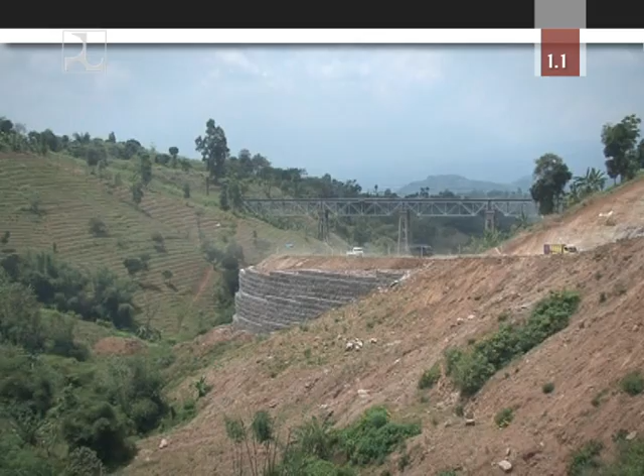Roadwork is important, necessary, and unavoidable in any road network. New roads must be built. Existing roads have to be maintained. Sometimes roads are duplicated or upgraded. New bridges and flyovers are built, and a wide variety of traffic management improvements take place.

In most cases, the roadwork has to take place in or close to moving traffic. Even when a new road is built through rice paddies and is able to be constructed free of traffic, it must eventually join to an existing road at each end. Unless very carefully managed, roadwork sites can lead to increased risk for those using the roads, as well as the road workers.

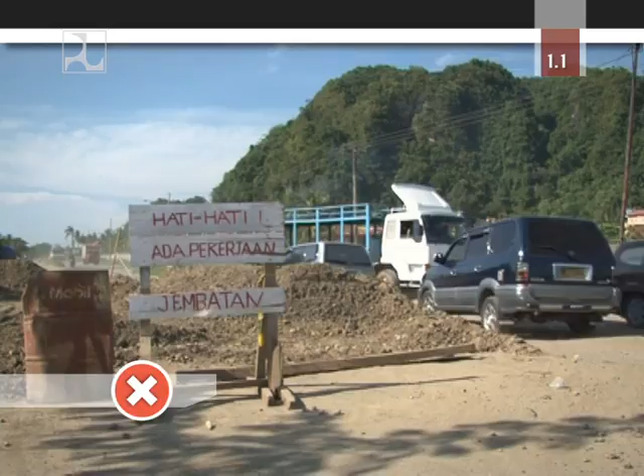Road safety at roadworks is an important but often neglected part of road construction and maintenance in Indonesia. The safe management of its roadwork sites is an important responsibility for any road authority. In Indonesia until now, a roadwork site has been characterized as a place with possible hidden surprises. Uneven road surfaces, few warning signs, and little guidance for the road users. It is time to improve this situation.

Road safety at roadwork sites in Indonesia can be improved, and at little cost. All it takes is dedication to safety by all responsible for the project: the contractor, the client, and the consultant. It also needs some clear thinking by engineers and the knowledge about what to do. This DVD and the accompanying manuals will give you that knowledge. Putting it to good use at roadwork sites in Indonesia is now your task.

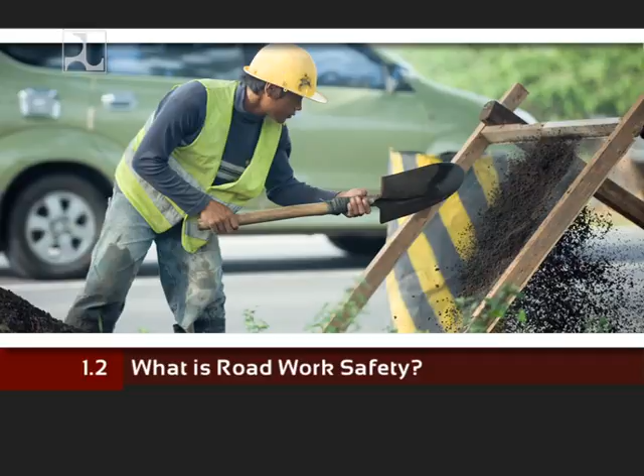Roadwork safety is the name given to the provision of signs, barriers, delineation, and other physical safety devices to ensure that the risk to road users and road workers at a roadwork site is as low as practical. Providing road safety at a roadwork site should be a high priority element of every road construction project or road maintenance activity, from the time the planning process begins until the time the project construction is complete. Traffic management at roadwork sites therefore often requires higher standards of safety than on the remainder of the road network.

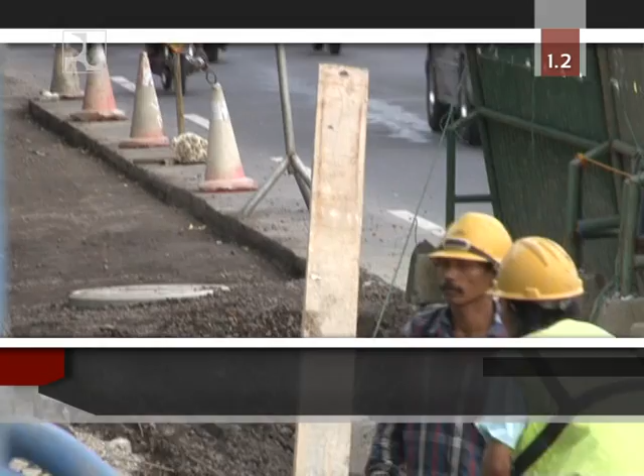For example, lane closures, lane narrowing, sharp curves, and other abrupt or frequent geometric changes must be appropriately designed in terms of speed, advanced warning, and delineation to provide road users with clear warnings and guidance. The signs and devices used at roadwork sites are a vital form of communication to the road user. Without a rational and consistent system of signage at roadwork sites, safety of the workers and travelling public is compromised.

The objectives of safe and effective worksite signing and traffic management are to provide a safe working environment for workers on the site, warn approaching road users and pedestrians of roadworks, guide the road users through, past, or around the roadwork sites safely, provide minimum inconvenience for the travelling public, and provide minimum inconvenience to work at the roadwork site.

Road crashes are due to three things: the human, the vehicle, or the road. Most people blame the human, the driver, the rider, the pedestrian, for all the crashes on the roads. Most people will say that the police should work harder to enforce the traffic rules, and in doing so the crashes will be reduced. Many road engineers also share this view. They underestimate the importance of their own work in reducing road crashes. Studies have shown that up to 30% of road crashes are due to the road and its interaction with the road user, the human.

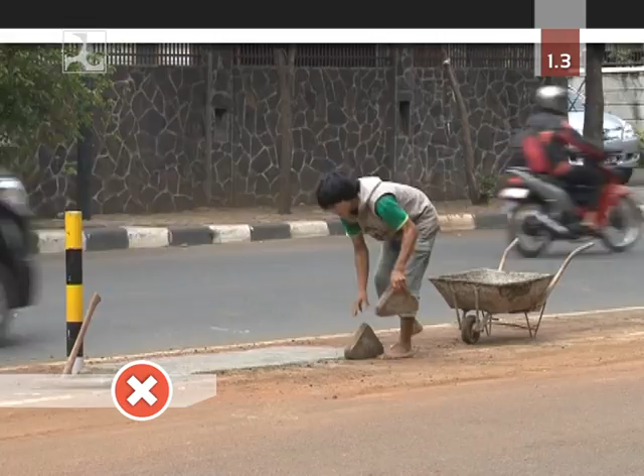At roadwork sites, for instance, engineers may fail to realise that many of the human mistakes that are made by the drivers or riders are due to failings by an engineer. A warning sign was not installed where it was needed. The roadwork site simply happened, without the necessary traffic management plan in place. Road safety engineers can improve safety at roadwork sites by putting themselves in the shoes of the road users and by empathizing with their needs.

An experienced road safety engineer will always ask the question, what will the road user make of this? An engineer who is concerned for road safety, as well as for the safety and well-being of the workers at the worksite, will then take steps to provide a worksite that is clearly signed, with strong delineation and clear speed restrictions.

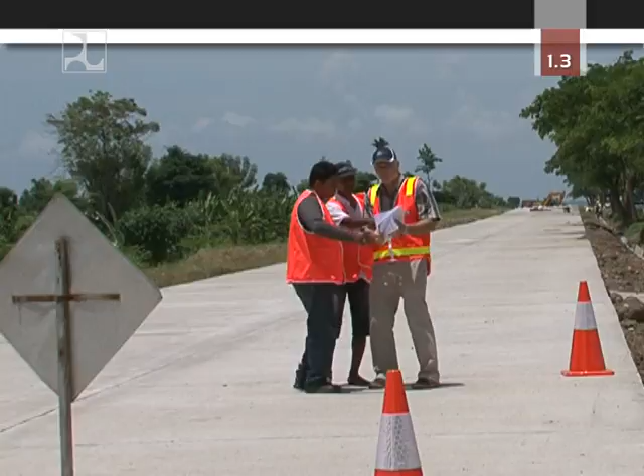Engineers can make a difference. Engineers can save lives and prevent injuries. You can use the advice contained in this DVD and accompanying manual at low cost to influence the design, construction, maintenance, and operation of safer roadwork sites. Engineers have a vital role to play in providing safer roads for all Indonesians.

Supervisors and workers have the following responsibilities. Supervisors should be aware of their responsibility to provide safe and convenient travelling conditions for the public and safe working conditions for personnel under their control. Establish the position of safety officer to care for all occupational health and safety, as well as road safety matters during the roadwork. This is especially important for long-term roadwork projects.

Ensure that all personnel involved in the traffic signing and traffic control are aware of what is needed and of their responsibilities. Provide training for all personnel involved in traffic signing control. Inform other road stakeholders, in particular the local Directorate General of Land Transport and the Traffic Police of the roadwork.

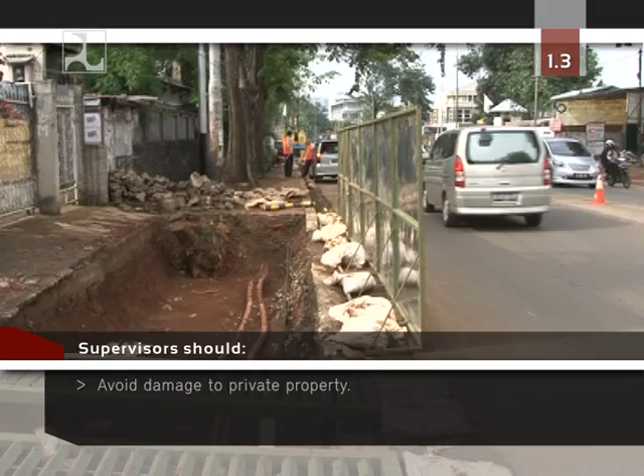Inform the road users about the roadwork. For long-term work, information about the duration of the roadwork should be provided so that the road user can anticipate the effect of the roadworks. If there will be congestion, they may wish to choose a different route. Manage the site to avoid damage to private property. Be familiar with the provisions of this DVD and manual and act accordingly.

Workers should take responsibility for their own safety by looking out for danger and being observant. Take care of the safety of other personnel and visitors to the worksite. Wear the protective clothing that is provided for their safety. Engage only in work practices that do not put himself or herself or any other person at risk. Follow the instructions of their employer in carrying out the requirements of this DVD and the accompanying manual.

There are three categories of roadworks: long-term works, short-term stationary works, short-term mobile works. Each of these three categories of roadwork should be suitably signposted in accordance with general principles governing proper signposting. This means that they must give drivers and riders proper and gradual advanced warning of the changes to the traffic conditions and ensure that vehicles pass through the roadwork safely.

The signposting must provide warning of the type and shape of obstruction and how to proceed so that drivers and riders can pass safely through or past the works area. In addition, signposting must be consistent and comprehensible and common to all roadworks along the road. The three different categories of roadworks usually require different types and amounts of traffic management. For this reason, planning the staging of the roadworks well in advance and designing a suitable and safe traffic management plan are two of the most important steps you can take in road safety at roadwork sites.

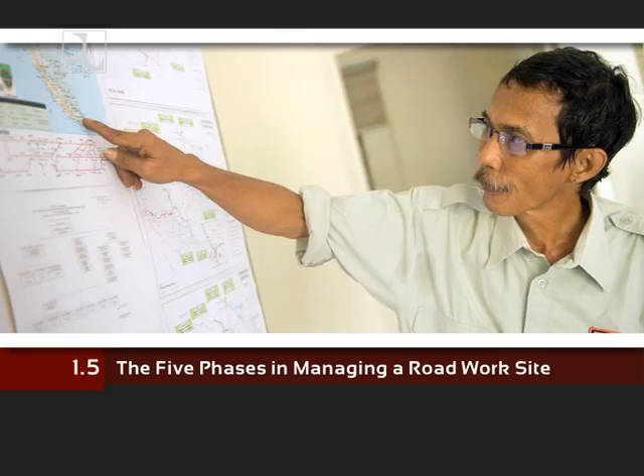The 5 phases of managing a roadwork site are: planning phase, design phase, implementation phase, operation and maintenance phase, closeout phase. Each of these phases has a clearly different and important role to play in your roadworks.

Planning ahead for safety at your worksite is always time well spent. It is a positive and necessary part of roadwork. There are some key steps along the way, and by carefully considering each one, you can design, implement, and manage a safe worksite. The contractor should start by designating an engineer as the responsible individual for roadwork safety at the worksite. That engineer should be responsible for preparing a traffic management plan, a plan that shows the exact signs, delineators, cones, barriers, and other traffic control devices to be used for each stage of the works.

Developing a traffic management plan takes knowledge and experience. Each site needs careful and detailed attention because no 2 work sites are the same. Despite the need to remember the uniqueness of your worksite, there are many common factors which reoccur on most roadwork sites. By following a series of key steps, you can gather together all the necessary information you need to develop a safe and effective TMP. Step 1. Decide the category of your roadwork. Roadworks are divided into 3 categories: long-term works, stationary short-term works, mobile short-term works.

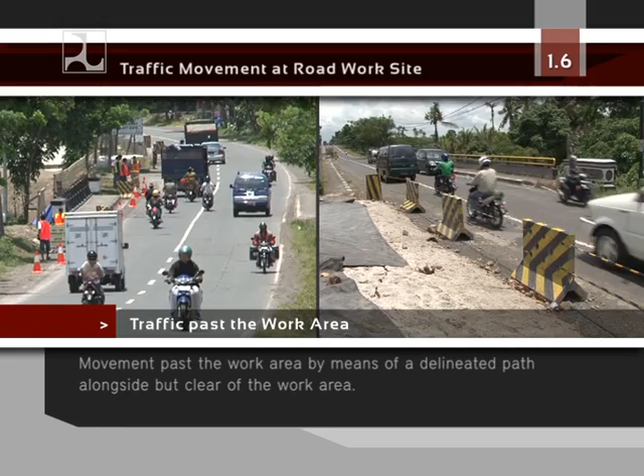Step 2. Establish the staging of your works. Begin by asking in which of the following ways the traffic at your roadwork site will be managed. Movement through the work area under closely controlled conditions. Movement past the work area by means of a delineated path alongside but clear of the work area. Movement around the work area by a detour, which may be via a side track or an existing road. Closure of the road for short periods while the work is carried out.

Decisions about the staging of the roadworks are fundamental to road safety. The staging of the roadworks will have a large impact on the road safety at the roadwork. The engineers responsible for the roadwork safety should communicate with the project manager and ascertain the staging of the works. This is a critical matter. Depending on the staging of the works, the preparation of the traffic management plan can either be a simple task or it can be a very complex task.

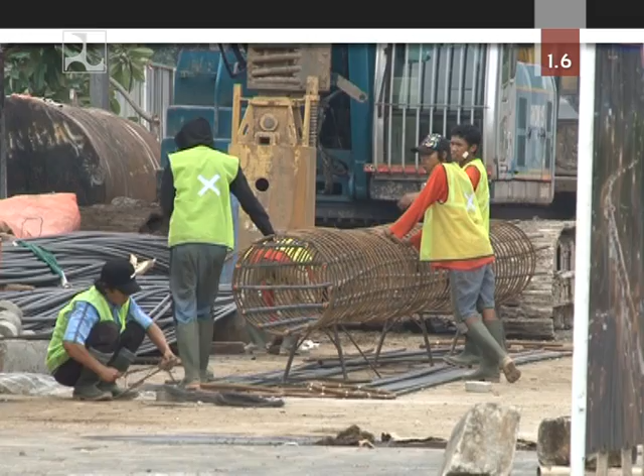Step 3. Consider the class of road, plus the volume and composition of the traffic. The road safety of road users and road workers will be enhanced by ensuring that the roadwork site is managed in such a way as to cause the minimum amount of inconvenience to traffic movements.

You may need to consider how your works can be arranged to minimize disruption of established traffic movements and patterns, interference with traffic at peak periods, interference with public transport services, and the amount of road closed to traffic at any one time.

You can minimize delays by maintaining open as many lanes as practical. You may minimize delays by having most work carried out at night. You may also be able to make use of portable traffic signals or well-trained traffic controllers in order to control the traffic movements as efficiently as possible.

Step 4. Consider where the traffic will go. Traffic will continue to use the road, and so clear decisions need to be made about just where the traffic is to be directed: through the work area, past the work area, or around the work area.

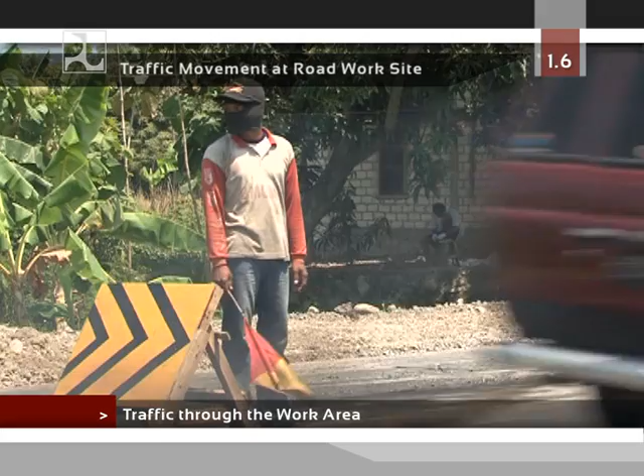Traffic passing through a work area should only be permitted where both the traffic and the work can be adequately controlled. Traffic controllers are usually required to slow or stop the traffic for short periods to allow the safe movement of machinery or for other operations.

Traffic past the work area. If a detour or sidetrack is not possible, the normal method for traffic management is to have the traffic travel past the work area. Traffic paths past the work area are to be clearly delineated to ensure the road users do not become confused and to minimise the risk that some may inadvertently enter the worksite.

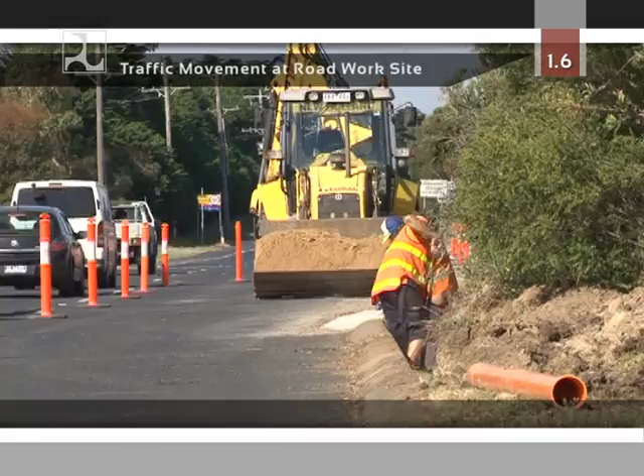Traffic around the work area. When it is not practicable to allow traffic through or past the work area, a detour is needed. Such a detour may involve using some of the existing road network, or it may involve a specifically constructed sidetrack.

Step 5. Consider the safety of road workers. Ask yourself the following questions related to worker safety. Is my work long-term or short-term? Worker safety at short-term works can be achieved by work methods that do not expose the workers to long periods of time working close to passing vehicles.

Safety measures such as high visibility clothing, warning devices on work vehicles, and other workers acting as lookout personnel can be suitable for these types of work. If these types of controls are not suitable for any reason, then more substantial controls are to be adopted.

How will workers be protected from traffic at the roadwork site? If your work is to be long-term, will it be through strong delineation and very low speeds, or by providing a barrier between the work area and the moving traffic? Or, if such a barrier is not practicable, will safety be assisted by providing an adequate lateral clearance between the edge of the work area and the nearest traffic lane?

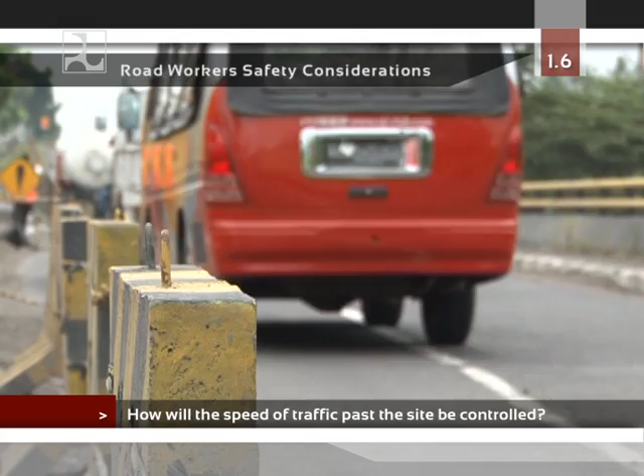Step 6. Consider how best to provide for pedestrians and bicyclists. Where pedestrians, including people with disabilities, have to move through, past, or around a work area, or to cross the road within a work site, they should be provided with and directed to suitably constructed and protected temporary footpaths and crossing points.

Pedestrian and bicycle paths should be provided on the same scale and to the same width as any facilities for pedestrians or bicycle traffic that existed prior to the works. Where footpaths or crossings for pedestrians have been temporarily relocated, the following requirements are recommended for the temporary facilities.

The footpath surface must accommodate all users. The surface of the footpaths and/or the crossings should provide safely and conveniently for handcarts and wheelchairs, and for the visually impaired.

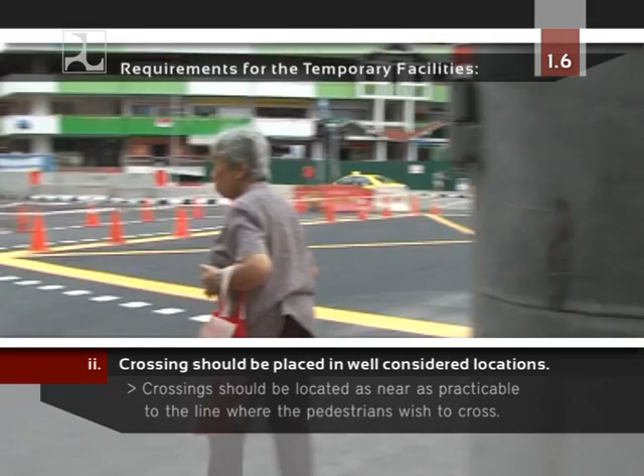Crossings should be placed in well-considered locations. Crossings should be located as near as practicable to the pedestrian's desire line, that is, where the pedestrians wish to cross. The crossings should be at the same standard of both width and surface smoothness as the crossings they replace.

Pedestrians and vehicles must be kept separated. Where pedestrian traffic has been diverted onto an existing roadway, the pedestrian path should be separated from vehicular traffic. A mesh fence with no hazardous struts or hazardous poles, or a solid line of plastic cones or bollards may be used for this.

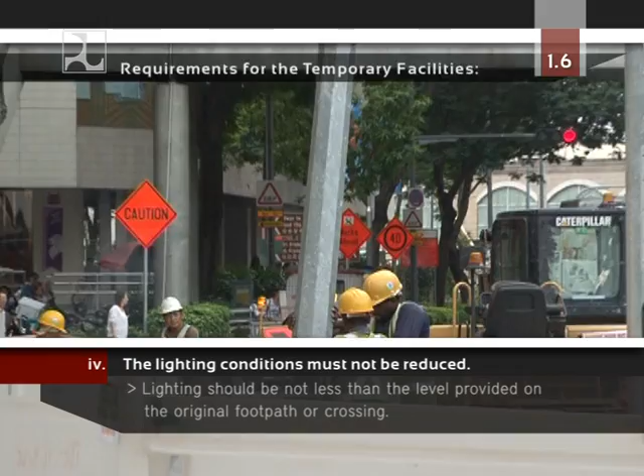The lighting conditions must not be reduced. Lighting should be no less than the level provided on the original footpath or crossing.

A traffic management plan, or TMP, is a plan that shows clearly all of the signs, barriers, barricades, and other devices that are to be installed and maintained at the roadwork site for the duration of the works. If the work has a number of stages, there should be a TMP for each stage. A TMP should be prepared for all roadwork sites, short and long term.

When preparing a TMP, start by looking at the large-scale issues and gradually work down towards the detailed items. The large-scale issues can be addressed in 3 steps. Step 1. Consider the risks at the worksite. The following are some hazards that could be encountered at a roadwork site and which need to be addressed in your TMP.

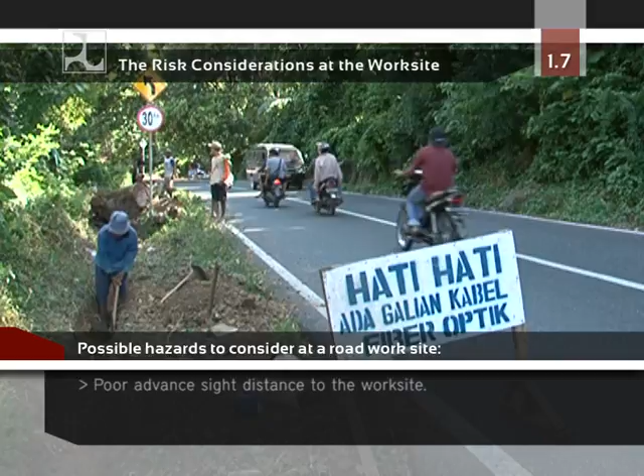Poor advance sight distance to the worksite. High-speed traffic through the worksite. High volume of traffic through the worksite. Narrow pavement width with no escape route. Workers too close to the passing traffic. Presence of unshielded hazards.

Excavation adjacent to traffic. Rough or unsealed road surface due to the roadworks. Loose material on the road surface. High volumes of heavy vehicles through the worksite. Work vehicles entering or leaving the worksite. Bicyclists or pedestrians moving through the worksite.

When deciding how to manage risk and how to keep a safe roadwork site, you should consider the severity of the hazard or risk, the state of knowledge about the hazard or risk, the nature of the works, for example long-term or short-term works, the availability and practicality of possible hazard or risk control measures, the cost of removing or mitigating that hazard or risk.

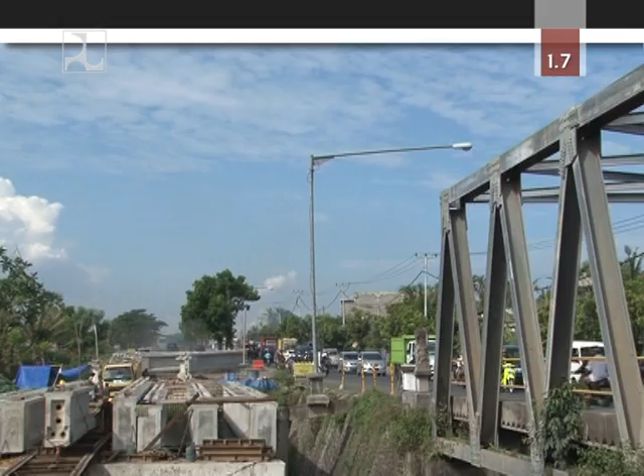Step 2. Consider the risk control measures that could be used at your worksite. The following examples are practical options within each risk control measure. Risk elimination. Can the risk be eliminated? Divert the traffic away from the worksite. Install a sidetrack. Close the road for the duration of the works.

Engineering controls. What engineering measures or protective devices can be implemented to minimize risk? Safety barriers, lane closures, reversible or contraflow traffic, portable traffic signals, crash attenuators, vehicle-mounted attenuators, escort or pilot vehicles, increased clearance to the worksite.

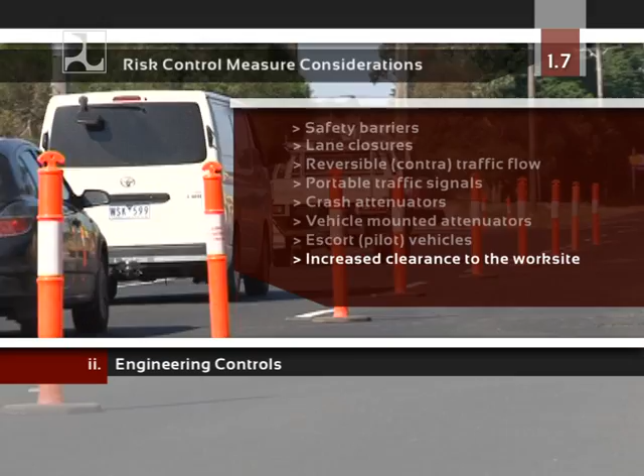Administrative personal protective equipment. What can be done to adjust the behaviour of traffic travelling through the worksite? Speed restrictions, signage, traffic cones and bollards, traffic controllers, delineation of the travel path, lead and/or tail vehicles, a variable message sign or VMS, vehicle-mounted signs and devices, working at night if safer, high visibility clothing for all workers.

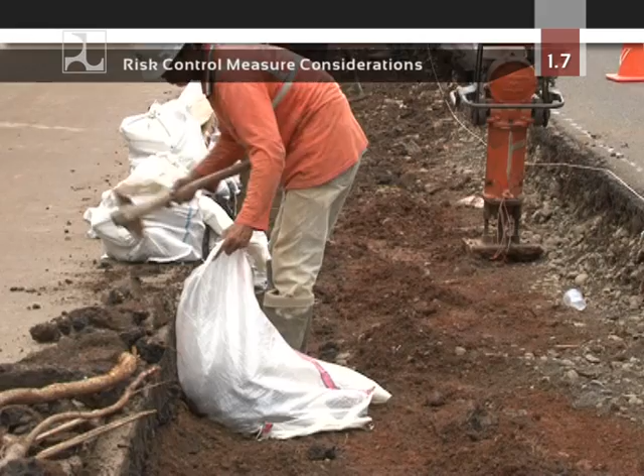In considering the risk control measures that could be used at your roadwork site, it should be recognised that there is often a need to satisfy competing objectives such as maximising the safety of workers and all road users, minimising the delays to traffic, managing the costs of the risk control measures so that they relate to the costs of the associated works.

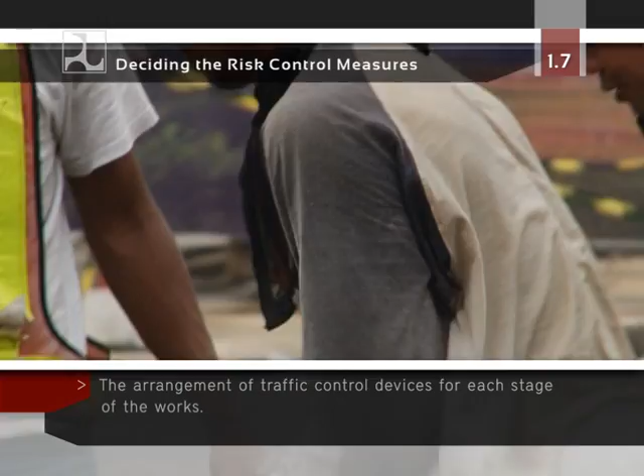Step 3. Decide the risk control measures to be implemented. Having considered all risks, decide on the risk control measures you will apply in consultation with those who will be working on the worksite or supervising the works. You now come to the point of considering site-specific points of detail for your TMP. The arrangement of traffic control devices for each stage of the works. Arrangement and number of traffic controllers required for each stage of the works.

Any job-specific requirements, for example, a nearby school, hospital, or access to shops. Provision for very large vehicles. Provision of safe passage for pedestrians, bicyclists, and people with disabilities. Impact on public transport. Potential for traffic to queue into conflict areas, for example, across an adjacent railway crossing. Provision for access to abutting properties.

Duration and time for conducting the works, for example, day or night operation. Traffic management arrangement at the worksite outside normal working hours or when workers are not present at the site. Emergency contact details. Communication arrangements.

A well-designed TMP will assist you to overcome the common problems at roadworks on Indonesian roads at present, such as placing advance warning signs too close to the work area, using incorrect signs, applying inadequate taper lengths, and using unsafe delineators. There are too many surprises for road users at work sites in Indonesia at present.

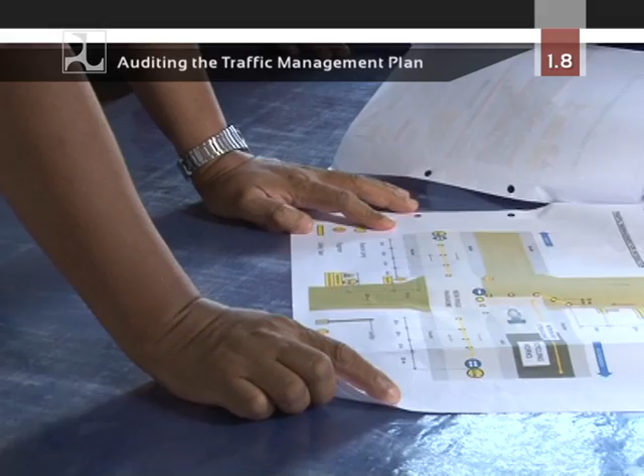To ensure the traffic management plan is adequate and is implemented correctly, the project manager is expected to commission an audit of the TMP before and after it is implemented at the roadwork site. Firstly, a desktop or before audit of the TMP is carried out. Once the TMP is implemented, the site or after audit is carried out. This audit should be conducted both daytime and nighttime.

Audits look at the traffic management arrangement from the road user's point of view. The audit team puts themselves in the shoes of the road users and should look for safety concerns. Signs that are missing, signs that are wrong, tapers that are too short, and items that are hazardous.

Items to consider in the desktop road safety audit include traffic volume and approach speed. Higher speeds and higher volumes generally increase the risk at a site. Road geometry. Will this reduce sight distance and increase the risk of surprises? Sign placement. Are all the signs located according to the zone concept?

If signs and markings conflict with one another, they must be removed or corrected. Travel path. Is it clear where all the drivers and riders are to travel? Delineation. Clear and made from forgiving materials. Have lane widths been changed or altered to allow for changes in the environment?

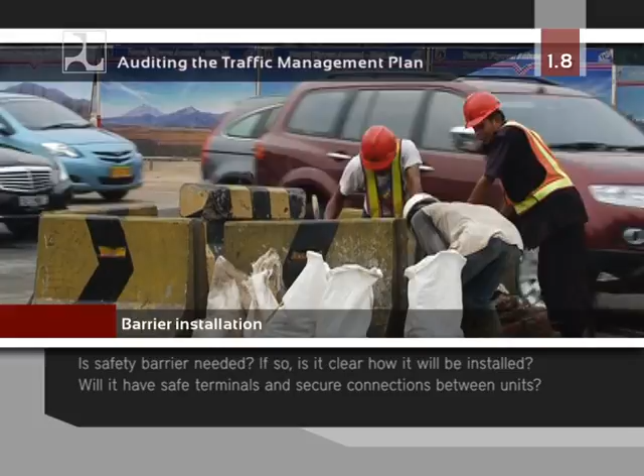Is safety barrier needed? If so, is it clear how it will be installed? Will it have safe terminals and secure connections between units? Roadside hazards. Have these been removed or shielded? Worker safety. Will workers be trained in worksite safety, and will they all be required to wear high visibility vests?

Is there an escape path for workers? Are pedestrians through or around the site being considered? Will all construction entry and exit points be safe? All the safety concerns detected in the desktop audit of the TMP are to be resolved by the project manager. Only after all are resolved can the work begin on setting up the roadwork signs and devices.

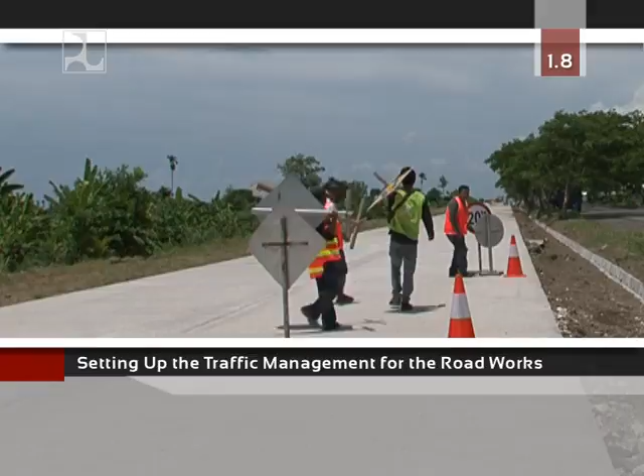Before any roadwork commences, all the signs and devices should be set out in accordance with the approved traffic management plan. This should be done in the following sequence: advance warning and regulatory signs in the approach warning zone, starting with the signs the greatest distance away from the work zone and working inwards towards the work zone. Signs in advance of the taper or near the start of the work area.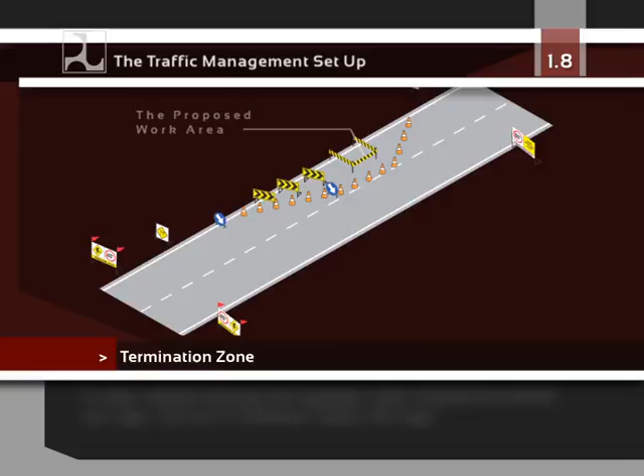All delineating devices required to form the taper, including illuminated flashing arrow signs at the end of the taper. All delineation of the work. All other required warning and regulatory signs, including termination zone signs and end of temporary speed zone signs.

After your traffic management plan has been implemented, an audit should be undertaken to ensure that it is installed and operating as expected. This audit should take place before the roadwork commences on the site. If changes are found necessary, these should be made straight away.

Common issues that you should look for during the audit inspection include signs that are located behind trees or obscured by structures, damaged and non-reflective signs or signs facing the wrong way, visible permanent signs that should be removed or covered during the roadworks, tapers that are too short, possibly because of horizontal or vertical geometry on the site,

gravel, mud, sand on the pavement. Ensure the pavement is swept clean of sand and gravel. This is critical for motorcyclists and small vehicles. Exposed roadside hazards that require added delineation or possibly shielding with barrier. In urban areas especially, but also in some rural areas, check to ensure that appropriate signs and devices have been installed on all nearby roads, including side roads, that will be impacted by the roadwork.

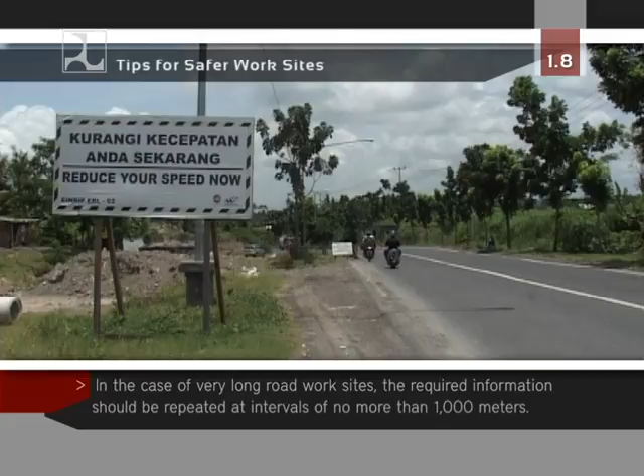Information, presented via traffic signs, should not be given too far ahead of the work area. Drivers and riders will tend to forget or doubt the information provided. In the case of a very long roadwork site, the required information should be repeated at intervals of no more than 1,000 meters. Signs and devices should be regularly checked and maintained in a satisfactory condition. A daily inspection, with damaged or missing signs replaced within the hour, should be your minimum expectation.

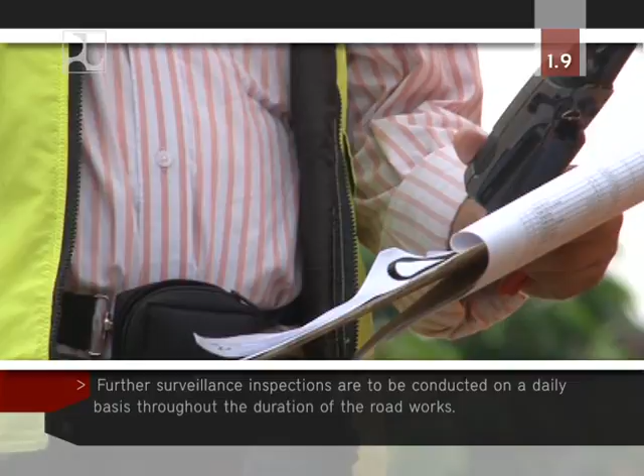The contractor's team commences the roadwork on site when approved by the project manager. This is after the road safety audit findings have been discussed and signed off. Further surveillance inspections are to be conducted on a daily basis throughout the duration of the roadworks. Written records including dates, times, findings, and the engineers involved should be made and kept.

The daily surveillance should check all of the signs and devices on the TMP. If signs are damaged, or if bollards are knocked over, these need to be recorded and rectified as a priority. Roadwork should not surprise a driver or rider. If we can achieve this, roadworks across Indonesia will be much safer for all.

The closeout phase is the phase after the roadworks have ended and during which the traffic management arrangements that have existed need to be removed. The most critical safety issue to watch out for during this phase is to make sure you do not take away necessary signs or delineation and leave hazards exposed.

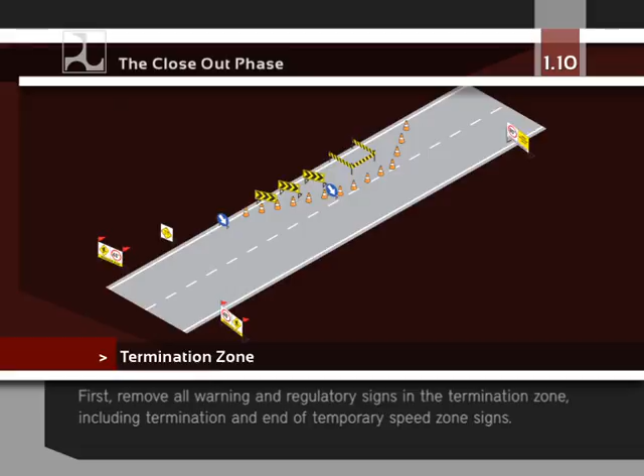Removing the signs and devices at the conclusion of the work is best done in the reverse order to the setting out. First, remove all warning and regulatory signs in the termination zone, including termination and end of temporary speed zone signs. Then remove the delineation around the work area and termination zone.

Remove all delineating devices in the taper, including any illuminated flashing arrow signs at the end of the taper. Remove the signs in advance of the taper or at the start of the work area. Finally, remove all remaining signs, including advance warning and regulatory signs, starting with the signs closest to the work zone and working outwards from the work zone.

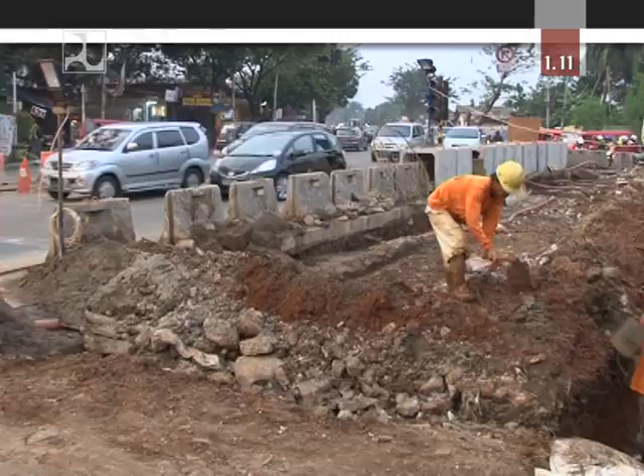There are two groups of customers on the worksite: road users and road workers. Both are humans. Both are important. Whether as road users or road workers, the customers of the traffic management plan are people. Some of the human factors to consider include:

Determine the expected speed of the traffic that will be passing through your worksite. Despite the speed limit that may apply, many drivers and riders travel faster than they should. At 100 kilometers an hour, a car is traveling at approximately 28 meters each second and can take over 200 meters to stop.

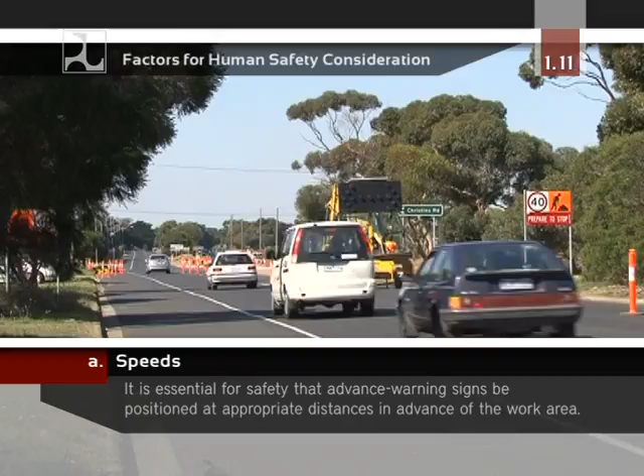It is essential for safety that advance warning signs be positioned at appropriate distances in advance of the work area. One of the common failings at roadwork sites in Indonesia is that the signs are placed too close to the work area. This is almost guaranteed to cause some surprises for some drivers or riders, and that is not good for safety. So ensure that signs are placed well in advance of the work area.

Drivers and riders take time to react once they have noticed something in their path. This time can vary between 1 and 3 seconds, depending on how alert the driver or rider is. Not all drivers are the same. Allow for an average driver or rider reaction time of 2 seconds. Therefore, the length of advance warning that is required in this manual allows for reaction time, as well as for stopping distance. Your roadwork signs must be conspicuous.

The 2-second rule is the norm for all appropriate driver reaction time. However, in a location with poor visibility to the roadworks, the advance warning distance should be longer. Ensure that signs meet national standards and that they are located to suit driver and rider eye height. Drivers and riders need to be able to read a sign while driving, and therefore signs must be designed to be legible from a distance. Symbol-type signs have a much higher recognition rate than word-type signs and should be used wherever possible.

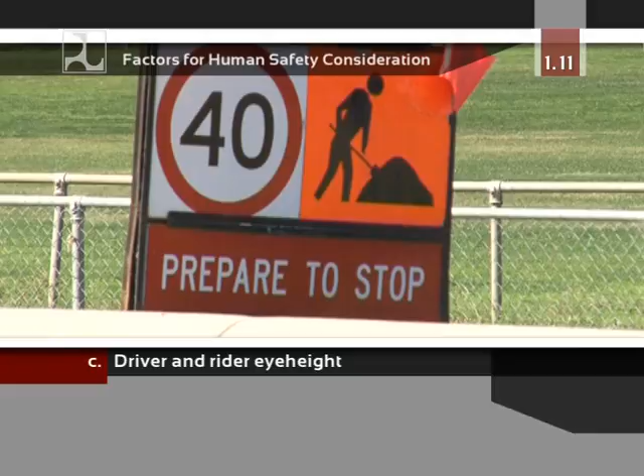Drivers and riders do not always expect the presence of roadwork sites. This lack of expectancy means they may be surprised when faced with a sudden change in the road situation without warning. Remember, there are to be no surprises at roadwork sites. Advance warning of roadwork sites creates an expectancy of changed traffic arrangements so that drivers and riders can modify their driving and look for appropriate guidance. The advance warning sign should be obvious, and the layout of the worksite management scheme should be clear and definite, allowing only one course of action for the driver.

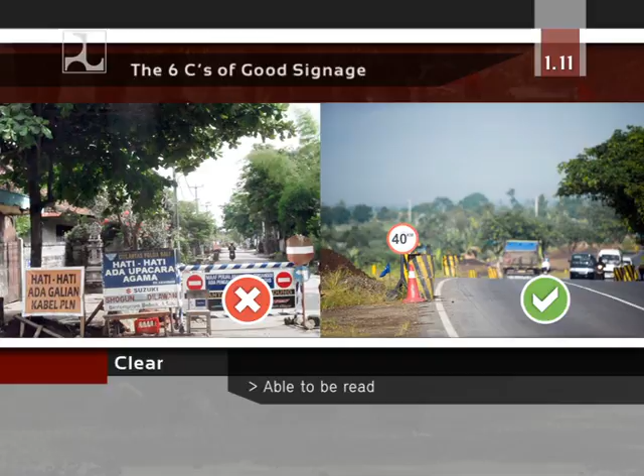All signs used at roadwork sites must meet the requirements of the 6 C's. The 6 C's of good signage are: conspicuous, able to be seen; clear, able to be read; comprehensible, able to be understood; credible, relevant to the situation; consistent with all other similar situations across the nation; correct, not just similar, but the correct sign. The proper use of signs is necessary in order to gain the confidence of the road users.

As the last line of safety, all road workers should wear high visibility safety vests at all times while on the road. Roadwork can be a tough, dirty, and demanding task. Under such conditions, authorities cannot and should not rely on the vigilance of the drivers and riders to protect their road workers. Road workers have a responsibility to look out for moving traffic. High visibility traffic safety vests increase worksite safety and road worker visibility.

The work may stop when darkness falls, but the traffic keeps moving. Darkness makes all of the above factors more critical. When the wider environment cannot be seen and visibility is limited to areas illuminated by car or motorcycle headlights, a worksite will usually require added delineation of traffic paths.

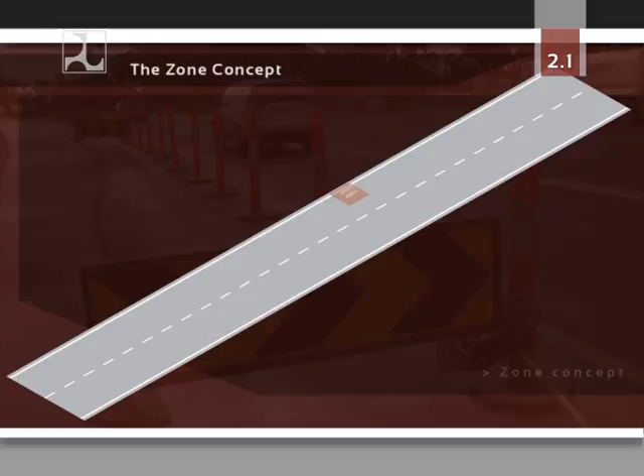Advanced Warning Zone. This zone alerts drivers and riders of the work zone ahead. This is the section of road where the travelling public is informed about the approaching roadworks and what is expected ahead.

Transition Guidance Taper Zone. The zone is used to guide drivers and riders into their correct path and at a correct, safe speed. This is the zone in which drivers and riders are redirected out of their normal path of travel.

Work Zone, including the work area and its surrounding safety buffer zone. This zone is to guide drivers and riders safely through the work zone and to safeguard the workers. This is the area in which the works are physically being carried out and is set aside for workers, machinery, equipment and materials.

Safety Buffer Zone. This zone is a part of the road included within the work zone. This is a longitudinal safety buffer immediately in advance of the work area that increases protection and safety for workers.

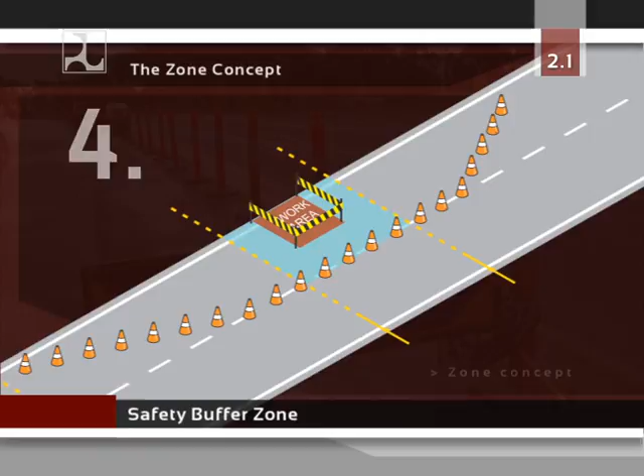Termination Zone. This zone is used to advise the drivers and riders of the end of the worksite. This is the area where traffic resumes normal operations after passing the work area and is informed of what is expected and allowed on the road beyond the worksite.

This is the first zone that an approaching driver or rider encounters. Its length is dependent on approach speeds. It can be up to 300 meters long, and it should never be less than 100 meters long. It uses advanced warning signs and regulatory signs to warn users of the work zone ahead and to regulate their behavior.

If drivers or riders are required to move from their lane to pass around a work zone, this is done in the transition guidance zone. This zone makes use of conspicuous and forgiving devices to create tapers to guide road users through, past, or around the work zone. Its length depends on the speed of traffic and the amount of lateral shift required.

Requirements for the display of advanced warning signs and devices vary according to factors, such as the speed of approaching traffic, the degree to which the hazard requires modification of speed or diversion of the travel path. There may also be a need for extra caution for other reasons, including sight obstruction caused by other traffic or the sight distance available to the hazard. One of the common failings in Indonesia is to place warning signs only a few meters in advance of the work zone. This is inadequate and unsafe.

The advanced warning zone is sufficiently long that the warning signs used in this zone must be located well in advance of the work zone, giving drivers and riders adequate time to recognize the work site and to take necessary action to slow down and to diverge if necessary. Remember, by setting out a good advanced warning zone, you will help to reduce the number of surprises at Indonesian roadwork sites.

The transition guidance taper zone is the length of road where drivers are directed out of their normal path of travel. The amount of taper to be provided depends on the amount of the roadway that needs to be closed or partially closed. The taper that guides drivers and riders to the new travel path clear of the work area is provided fully within the transition guidance zone.

There are two common types of tapers. One where the lane moves across without any merging of traffic, known as a diverge taper, and one where the lane of traffic must merge with the traffic in the lane beside it, which is known as a merge taper. A merge taper requires a longer distance because drivers and riders are required to combine from two lanes of traffic into one lane of traffic.

Never permit things such as rocks, branches, concrete barricades, planks of wood, or concrete curbstones to be used to create tapers. They are difficult to see, and if struck, they can cause serious injury. You should not use them anywhere on the roads.

The work zone. This is the area where the roadwork is being done. It is where the workers are located and where most of the machinery is likely to be. Employers have an important obligation to provide a safe working environment that minimises the likelihood of injury to their workers anywhere, but especially within or adjacent to the work zone.

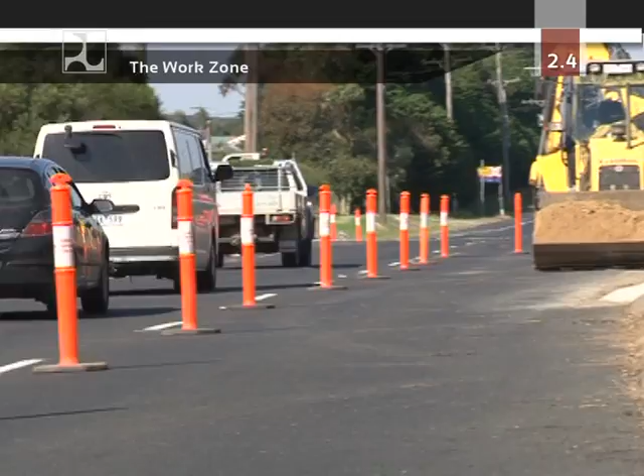One of the most useful ways to meet this obligation is to ensure that the advanced warning zone and the transition guidance zone are installed correctly and are clearly visible. These key actions will reduce the risk that a vehicle will inadvertently enter the work area. Depending on circumstances, you may decide to manage the traffic at your work zone in one of the following ways.

Traffic passes through the work zone under closely controlled conditions. The passage of traffic through a work zone should only be permitted where both the traffic and the work can be effectively controlled. Traffic controllers or flagmen may be used as necessary to further slow down traffic on the approach to the work zone and to stop the traffic for short periods if required. Traffic controllers may also be required to control the movement of work vehicles within or across the traffic path.

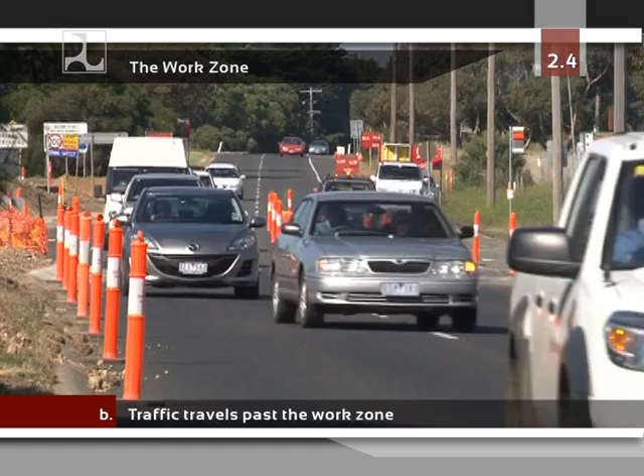Traffic travels past the work zone by means of a defined path alongside, but clear of the work zone. This will be the normal method of traffic management at sites where complete exclusion of traffic from the work zone is achieved. Traffic is directed past the work zone and is not permitted into the work zone. The passageway for the traffic past the work zone must be clearly defined and delineated. High visibility plastic cones and delineators are best for this task.

Traffic passes around the work zone by a detour, which may be via an existing road or a side track. When it is not practical or safe to allow traffic through or past the work area, it will be necessary to provide a detour using either existing roads or a specially constructed side track.

The existing road option can include the other carriageway of a divided road. By constructing a crossover to the other carriageway and by permitting contraflow on that carriageway, a suitable detour may be possible. Detailed planning is usually required for these situations.

In particular, remember to inform drivers and riders that they are no longer on a one-way carriageway. Consistently remind them that they are now sharing a carriageway with traffic from the other direction. Use two-way traffic warning signs at frequent intervals, and use cones and/or plastic delineators between the opposing streams to make this point.

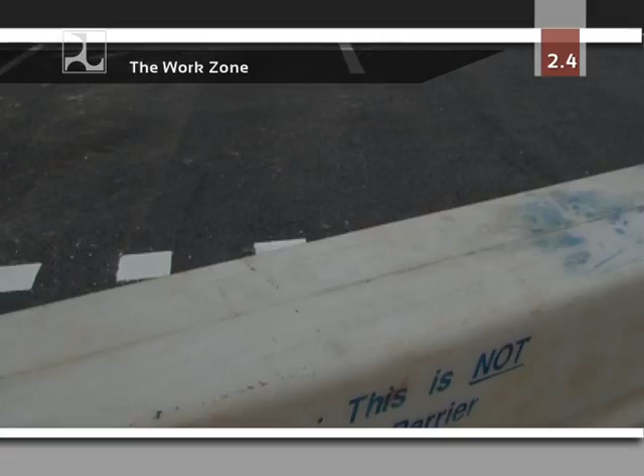Closure of the road for short periods while the work is being completed. You may consider the full closure of a road for short periods if the through traffic will not be seriously affected by the delay and it is possible to reopen the road without prolonged operation.

In making this decision, you will need to have a good idea of the traffic volumes and the likely queue lengths that will form. Posting signs that pre-alert drivers and riders to the possibility of such delays is always advisable. It gives them a chance to seek an alternate route if one exists. The full closure of very low volume roads may be an option if the work can be safely carried out while only allowing local vehicle access.

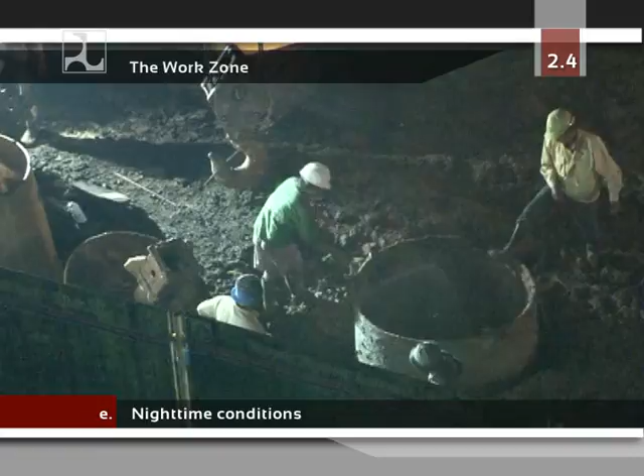Long-term work means that the traffic management devices at the roadwork site will be in place at night. At some work zones, the work will take place through the night. At most work zones, however, the work will stop at night and resume the next day.

Where pedestrians, including people with disabilities, have to move through, past, or around the work zone, or to cross the road within the work zone, they should be provided with suitably constructed and protected temporary footpaths and crossing points. If the pedestrians have been directed onto the road, the pedestrians should be separated from vehicles by the use of

plastic mesh fence on low-speed roads, or where the roadwork speed limit has been reduced to below 60 km an hour. In a high-speed environment, concrete barriers should be used to separate the pedestrians from the traffic. The concrete barriers must be securely joined to create a strong and continuous barrier. In short, never forget that pedestrians will be walking through or past your work zone, and provide safely for them.

It is important to advise the travelling public that they have passed the end of the work zone. It is also important to guide and control them back into their normal driving or riding conditions. The termination zone is the area in which traffic resumes normal operation after passing the work zone. Typical signs used in this zone will include end roadwork, end detour, and end roadwork speed limit, as applicable.

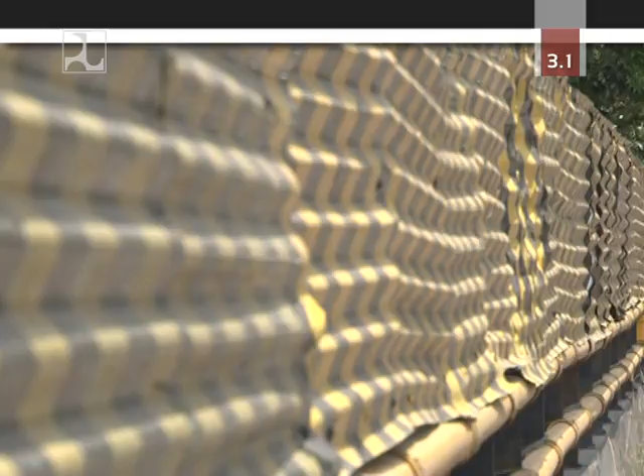The function of the signs and devices used for traffic control at a roadwork zone is specifically to give warning, guidance, and instruction to the road users about the roadwork ahead. Advise of the presence of workers and equipment on or near the road ahead. Ensure speed control as required for safety.

Advise the road users of the correct path to use. Prohibit road users' access to the work zone, and thereby assist the safety of the workers. Advise the road users that they have reached the end of the roadwork zone.

Indonesia has agreed formats, fonts, shapes and colours for its road signs. You should comply with these requirements on all your projects. Drivers and riders react more quickly and more correctly when they see standard signs and devices. It reduces the potential for misunderstanding.

Supports for roadwork signs are required to suit a variety of maintenance and construction situations. Signs and supports used for short-term operations and situations where signs are required to be moved on a regular basis should be portable and easy to erect.

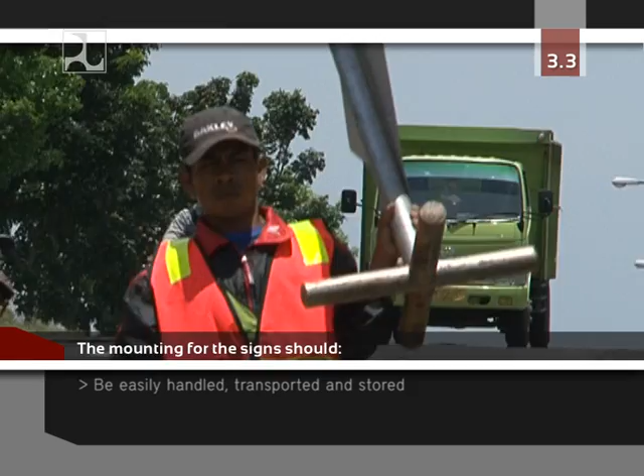The mounting for the sign should be quick and easy to install, be secure for the sign attachment, be stable in windy conditions and from the effect of moving traffic, provide for installation on all types of road and shoulder surfaces, be easily handled, transported and stored, and not be a hazard to road users if struck in their normal upright position or after being knocked over.

It is usual to separate signs by 2 seconds of travel distance. That means, if the typical operating speed is 65 kilometers an hour, or 18 meters a second, 2 signs should be at least 36 meters apart. In some instances, however, 2 signs may be displayed together at the one position. For example, a worker sign and a speed restriction sign may be displayed on the same mounting, either side by side or one above the other.

Multi-message signs are a good alternative to standalone signs. They make the task of signing easier and cheaper due to the lightweight, compact sign materials. A multi-message sign is a frame into which a combination of lightweight signs can be slid according to the needs of the worksite.

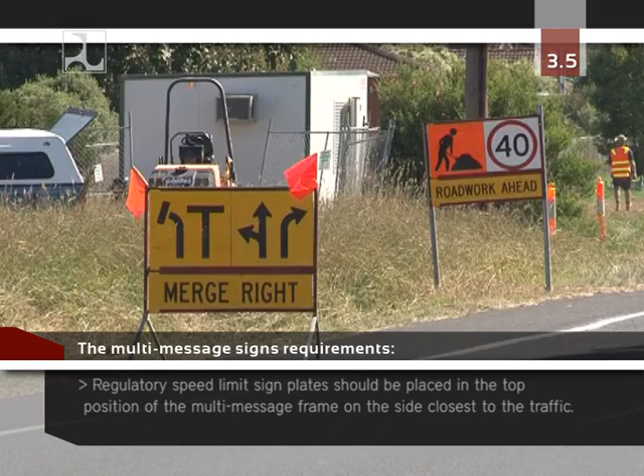The use of multi-message signs should comply with the following requirements. Individual message plates should comply with the requirements for the related standalone sign. When used, regulatory speed limit plates should be placed in the top position of the multi-message frame, on the side closest to the traffic. When used on high-speed roads, multi-message sign assemblies should be duplicated on both sides of the roadway.

The frame for multi-message signs is made of lightweight metal and is designed to stand securely without support. The frame should be capable of holding back-to-back message plates. This allows the frame to serve 2 directions if necessary. The sizes of symbols and words on message plates should generally accord with their standalone signs. However, it is acceptable for the size of the legend to be reduced slightly if it is necessary to fit into the relevant plate size.

There are 2 common errors with signage at roadwork sites in Indonesia. Many times there are no signs or not enough signs used. At other times, there are enough signs used, but they are incorrect signs for the situation, and they are often in poor condition.

Too often in Indonesia, old and ineffective signs are used at work sites. With some attention to just a few basic details, you can put your signs and devices to much greater effect at your roadworks.

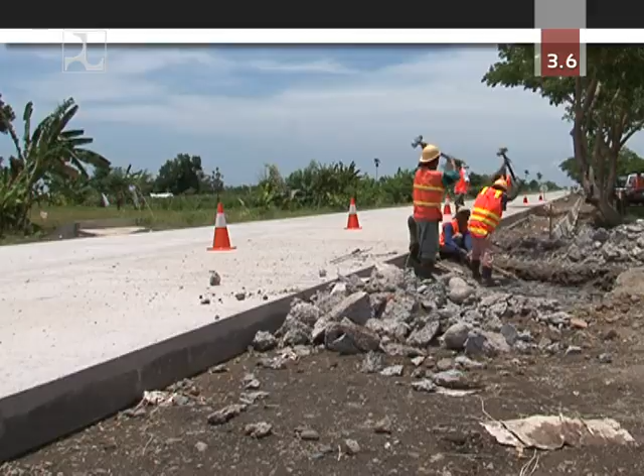Before work commences, the signs and devices should be set out in accordance with the approved traffic management plan and in the following sequence. Firstly, all advanced warning and regulatory signs, starting with the signs the greatest distance away from the work zone and working inwards towards the work zone. Secondly, all signs in advance of the taper or the start of the work area.

Thirdly, all delineating devices required to form the taper, including, if required, illuminated flashing arrow signs at the end of the taper. Then, the delineation of the worksite. Finally, any other required warning or regulatory signs, including termination and end of temporary speed zone signs, should be put in place.

Removing or retrieving of the signs and devices at the conclusion of the work should be done in the reverse order, using the same work method as for setting out. Signs must be able to be seen by all drivers and riders. Therefore, it is necessary that all signs face towards approaching traffic, approximately at right angles to the line of sight of the driver.

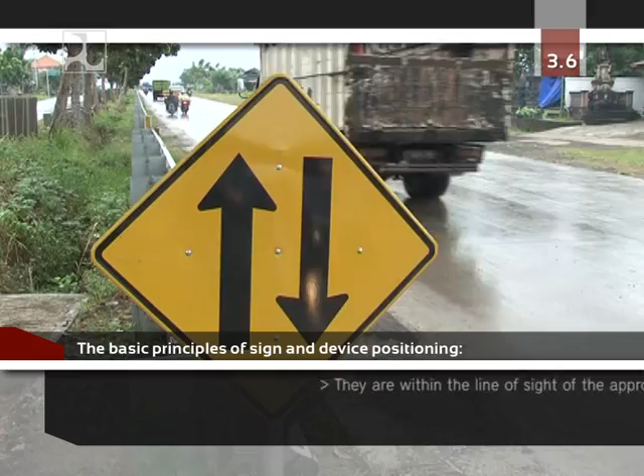All the signs and devices used at your worksite should be positioned and erected so that they are properly displayed and securely mounted. They are within the line of sight of the approaching road users. They are not, and cannot be, obscured from view by things such as vegetation, warungs, or parked vehicles. They do not obscure other devices from the line of sight of the approaching road users.

They do not become a possible hazard to workers, pedestrians, or vehicles. They do not direct traffic into an unsafe path. They do not restrict sight distance for drivers and riders entering from side roads or private driveways.

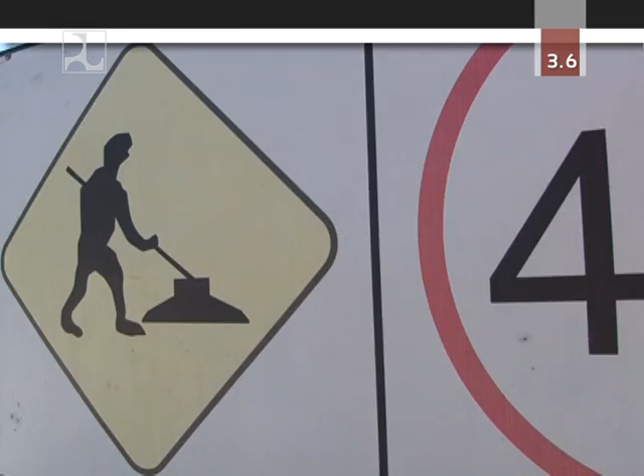At the worksite, when all of the signs and devices have been erected and the condition of the signs and devices has been checked on site, one further inspection is needed to ensure the intended message is being properly conveyed to the road users. This inspection should be carried out from within the normal traffic stream at normal traffic speed. Each sign and device is observed to see that it is fulfilling its intended use.

You should also undertake a nighttime inspection to ensure the signs and devices are functioning correctly after dark. Similar inspections should be carried out after any major change is made to the traffic management plan. As soon as the roadwork is completed, the signs and devices should be removed or concealed from view.

Drivers and riders are expected to comply with the signs and devices you place at a worksite. All your effort should go towards gaining driver and rider compliance with your traffic management work. It therefore follows that unnecessary signs and devices should not be visible to drivers and riders, as these will contradict the positive message you're attempting to convey.

A vehicle travelling at high speed takes much longer to stop than the same vehicle travelling at low speed. This may result in more crashes, and it will almost certainly result in more severe consequences when the crash does occur. Managing speed is an important task on all roads for engineers and police in Indonesia.

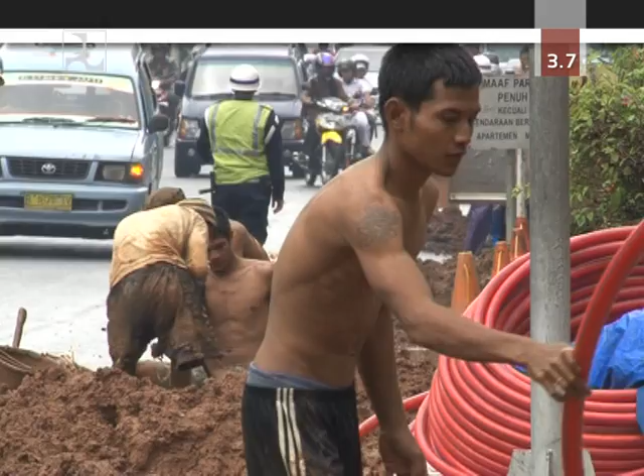It takes on added importance at roadwork sites, where conditions may change often and where workers are sometimes close to traffic. Roadwork zones are typically locations where unexpected things can happen more often than on other parts of the road network. Roadwork zones are therefore locations where all the traffic should travel slowly. You have an important role to play in working with local traffic police to ensure that speeds through work zones are managed for safety.

Engineers have only one tool available to them: speed restriction zones. These are zones that start and end with speed restriction signs. After the traffic has passed the worksite, it is vital that the roadwork site's speed limit ends, and the drivers and riders are returned to the existing speed limit. This is done by posting the existing limit restriction in the termination zone.

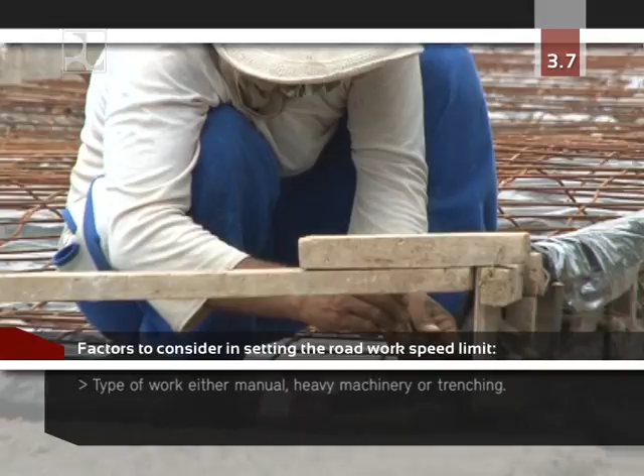When determining the speed limit to be adopted throughout a roadwork site, the potential hazards that you need to consider include clearance between the traffic lanes and the work area, traffic volume and vehicle composition, for example, the number of heavy vehicles, type of work, either manual, heavy machinery or trenching, duration of work, either long-term, short-term, or mobile. Time of work, for example, night works. The braking distance of a car travelling at a particular speed.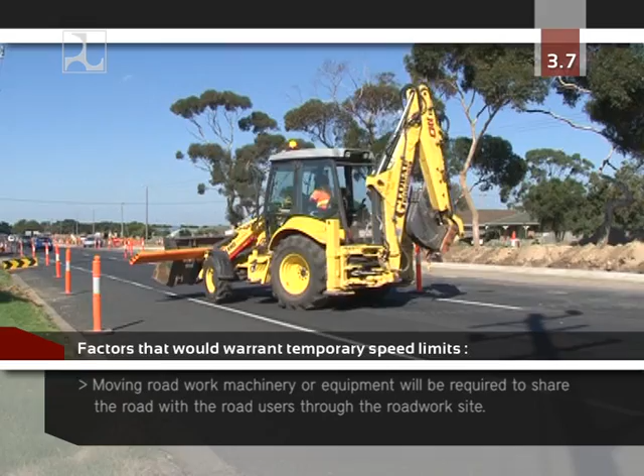You should install a reduced roadwork speed limit when one or more of the following conditions applies at your worksite. The safety of workers may be compromised by the close proximity to the traffic. Moving roadwork machinery or equipment will be required to share the road with the road users through the roadwork site. Loose material or stones are likely to be present on the road surface. The standard of vertical or horizontal road geometry, for example, inadequate sight distance, at the approach to or within a work site will be reduced below that of the adjacent sections of the road.

The unobstructed clear width of the roadway will be significantly reduced. The safety of road users travelling through the worksite at the permanent speed limit will in some other way be compromised. In particular, the safety of pedestrians, bicyclists, and people with disabilities will be compromised.

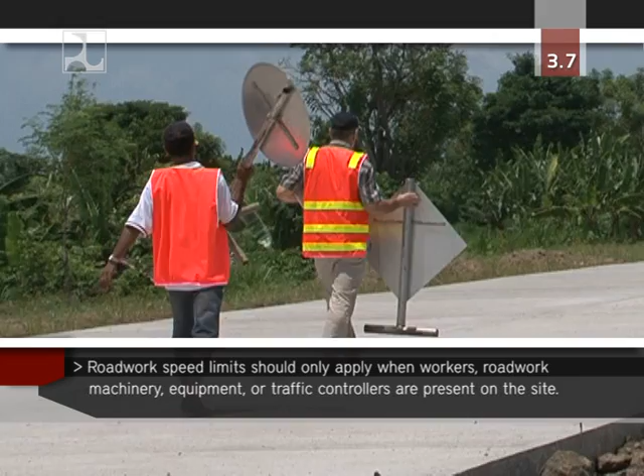Roadwork speed limits should be removed when there is no longer a need for the speed of the traffic to be restricted for the roadworks. Roadwork speed limits should only apply when workers, roadwork machinery and equipment, or traffic controllers are present on the worksite. At other times, the roadwork speed restriction signs should be removed or covered up.

Special provision should be made if you expect pedestrians and bicyclists to pass through, past, or around the roadwork site you are to manage. The path provided for them should be located as far as is reasonably practicable from the roadway, be smooth and free from obstructions, be of adequate width, be clearly signed and delineated. It should be constructed to prevent pedestrians from walking through the roadwork area and provide clear guidance where the path changes direction.

Where works may adversely affect access to a bus stop or a train station, thought needs to be given to the location and method of providing alternative access for the duration of the works. This will require consultation with the relevant bus or train operator. If your roadwork is likely to obstruct access to nearby businesses, thought needs to be given to enabling access for pedestrians and bicyclists.

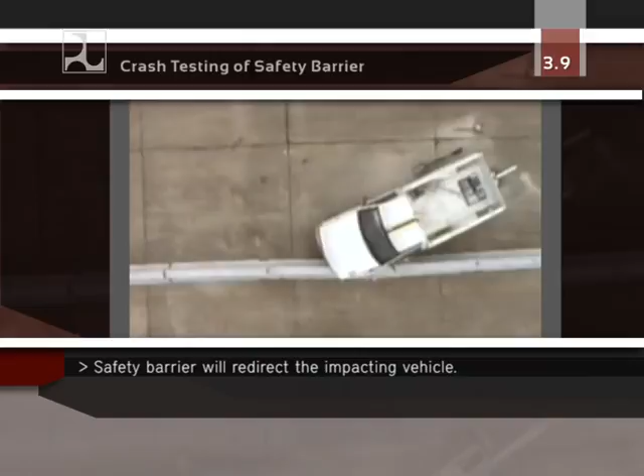A road safety barrier system is designed to provide a physical barrier between the travelled way and the work area. If you decide to use a safety barrier at your worksite, it must be designed and installed so that it will inhibit penetration by an out-of-control vehicle, and it will also redirect the impacting vehicle. A safety barrier provides general protection for road workers from passing traffic.

Safety barriers may be required where any of the following occur. There is inadequate safe clearance between workers and equipment and moving traffic. There is potential for traffic conflicts, such as head-on collisions. There are hazardous objects or excavations near traffic. There is inadequate safe clearance between the temporary footpaths or bicycle paths and moving traffic.

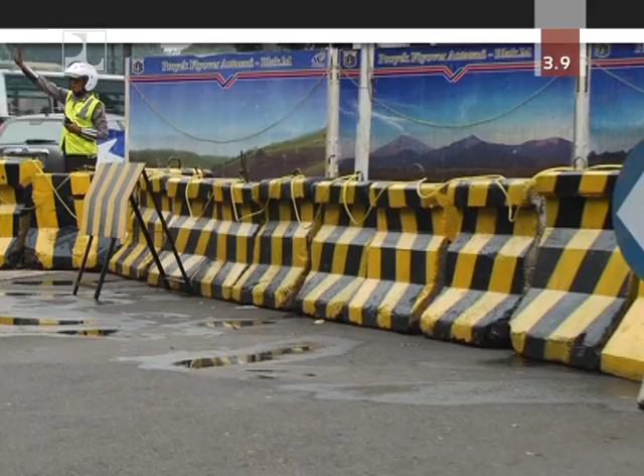Any safety barrier used at a roadwork site should satisfy international testing standards. You should therefore ensure that any safety barrier used at your site is of a type that has been certified and tested. If safety barriers are to be used at your roadwork site, a safe system of work should be developed. This should take into consideration the type, shape, protection, performance, and test characteristics of the safety barrier as stated by the manufacturer, the speed of traffic travelling through the worksite, the clearance between the traffic and work area.

Safety barriers are used to prevent vehicles from entering the work area. But barriers themselves are roadside hazards, and it is important to try and install them in a way that reduces the possibility of them being hit by vehicles that may stray just a small amount from the travel path. The minimum length of safety barrier to be used at roadworks is 30 metres, plus suitable end terminals. Usually longer lengths are needed to fully shield the work area.

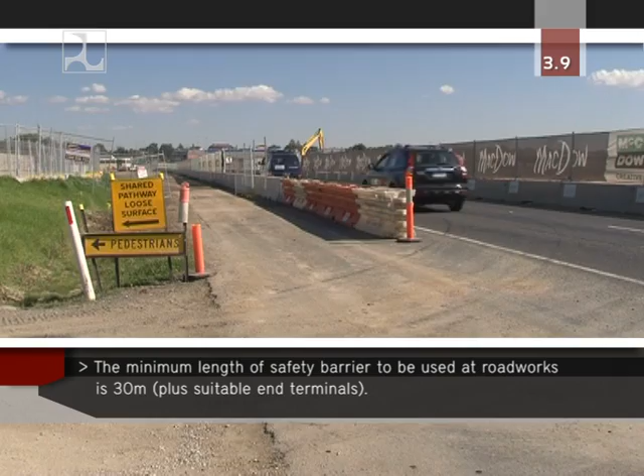The ends of a safety barrier represent a safety risk to road users. Take special care to ensure that safe terminals are fitted to the temporary safety barriers at your work area. Safe terminals may include water-filled barriers or portable steel barriers that are flared away from the road and end outside the clear zone. An alternative, but more expensive option, is to use crash cushions on the end of the barrier.

As well, install a non-rigid, retro-reflective hazard marker on the terminal to make it more visible to approaching drivers and riders at night.

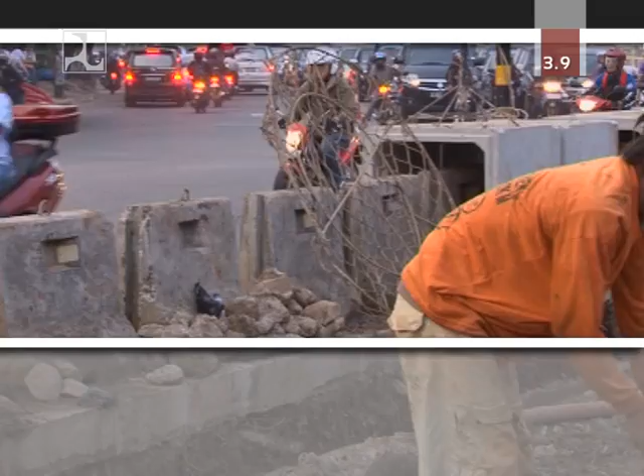When safety barriers are in place, your workers should not be allowed to work behind the safety barriers within the no-go zone. The no-go zone is necessary because most temporary crash barriers will deflect when struck by an errant vehicle. In some situations, the barrier will deflect up to several meters, depending on the size of the impacting vehicle, its speed, and its angle of impact.

If a worker is within the no-go zone at the time of the impact, they risk serious injury from the errant vehicle and/or the barrier. The minimum width for the no-go zone should be the maximum deflection specified by the manufacturer for the safety barrier.

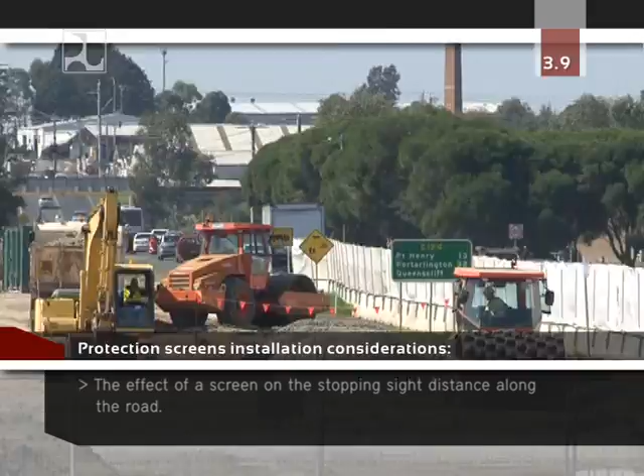Where safety barriers are used on high-speed roads, debris protection screens may be considered to protect workers from debris falling from passing vehicles. These screens also have the added advantage of protecting motorists and motorcyclists from work activities. Where you propose to erect a screen, consider the following. The effect of the screen on the stopping sight distance along the road. For example, roads with small radius curves.

The stability of a screen and safety barrier under all conditions at a work site. For example, wind load, including passing vehicle wind load. The effect of the height of the screen on the stability of the safety barrier. Crash testing evidence, clearly documented historical information or engineering analysis to show that this is acceptable.

The need for emergency accesses, such as in the form of an access gate or door in the screen. The effect of the screen on the sight distance of drivers of construction vehicles when entering the traffic stream from the worksite.

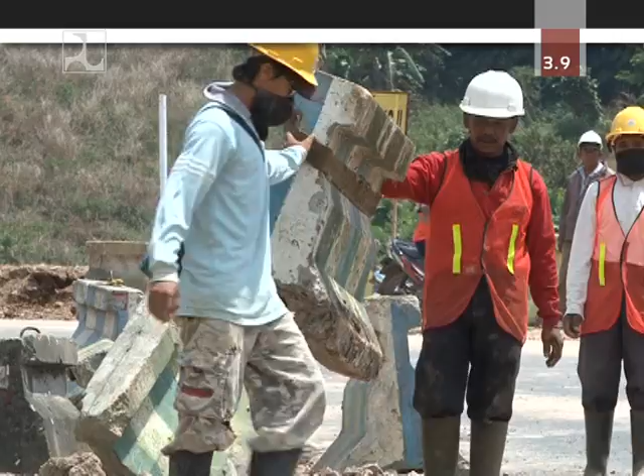One of the activities that has additional risk at a worksite is moving barriers into place. For safety at this time, the following general principles should be followed when moving safety barriers around a worksite. The work should be carried out during daylight hours where possible. Ensure that you have appropriate speed limits in place at your worksite. Give attention to the direction of erection and removal of safety barriers. That is, generally facing oncoming traffic, with terminal crash attenuators installed first and removed last.

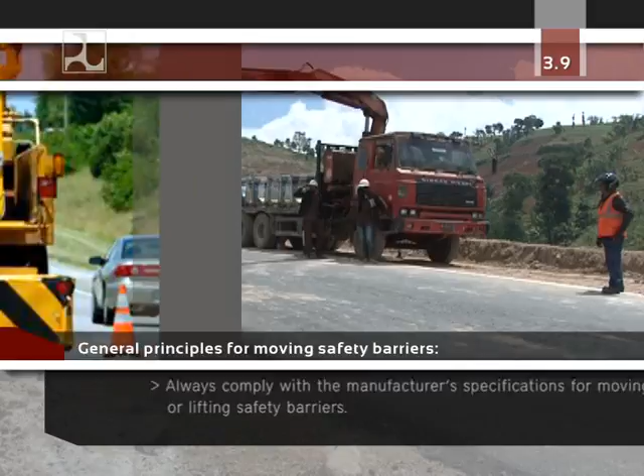Consideration should be given to using a shadow vehicle with an impact attenuator on roads with high speed and/or high volume traffic. Always comply with the manufacturer's specifications for moving or lifting the safety barrier.

Portable traffic signals are an expensive but effective form of traffic control that can assist you in managing traffic safely at short-term roadwork sites. You should install a traffic signals ahead warning sign on the approach to any portable traffic signals. The stop here on red signal sign is a useful sign that can be used in conjunction with the portable traffic signals to indicate where traffic must stop, even if a stop line is provided.

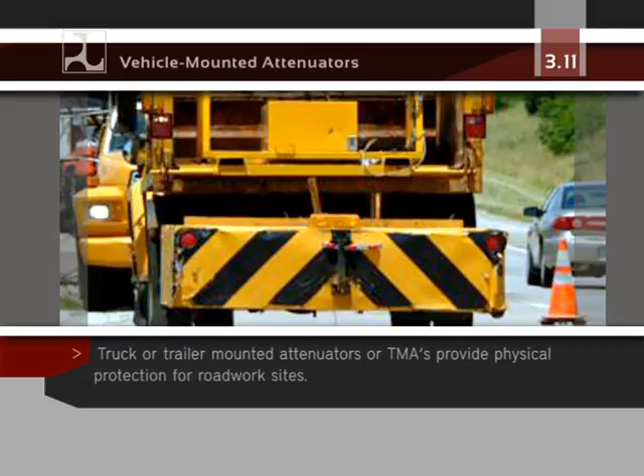A truck or trailer-mounted attenuator is a crash cushion located on the back of a truck. Truck or trailer-mounted attenuators, or TMAs, provide physical protection for roadwork sites where the provision of safety barriers or road closures is not practicable. TMAs are particularly applicable to short-term and mobile roadwork sites where workers are on the roadway or shoulder.

An electronic variable message sign, or VMS, is a traffic control device which can be programmed to display a message to road users. An electronic VMS can comprise either of the following. A mobile VMS may be trailer-mounted or vehicle-mounted and can be readily moved to a location as required. This allows the information to be given at the point of maximum impact.

Fixed VMS. This is erected beside or above generally high-speed, high-volume, multi-lane roads for traffic control purposes. Although these are mainly used for traffic control or to alert drivers to congestion ahead, they may also be used as warning devices for works along the road.

A VMS may be used to provide added advanced warning to road users on high-speed and/or high-volume roads where roadwork activities may cause delays, or may require stopping, slowing, merging, or other maneuvers that need a specific reaction.

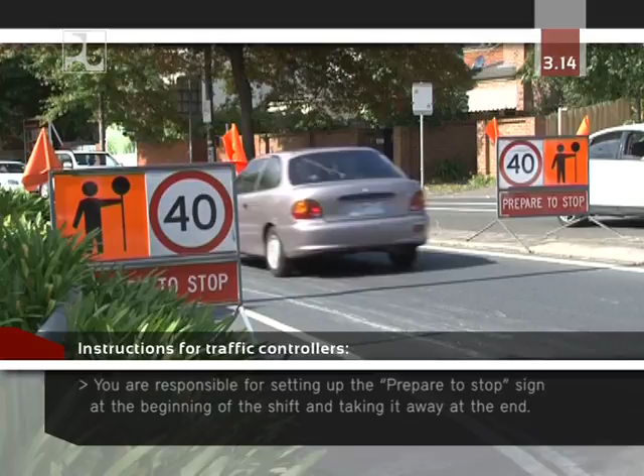You are responsible for setting up the Prepare to Stop sign at the beginning of the shift and taking it away at the end. If you take over traffic control part way through a shift, you must check that this sign is in the correct place. Try to stand where you can see both the end of the work area nearest to you and also the controller at the other end. You must also be able to see approaching vehicles at least 1.5 times the speed limit in meters.

Stand facing the traffic, but just outside the path of vehicles. You must make sure you do not obstruct a driver's view of other signs and devices, and that you are not yourself partially hidden by one of these. Work out what you would do if a vehicle is heading towards you and appears not to be stopping. Have an escape path ready.

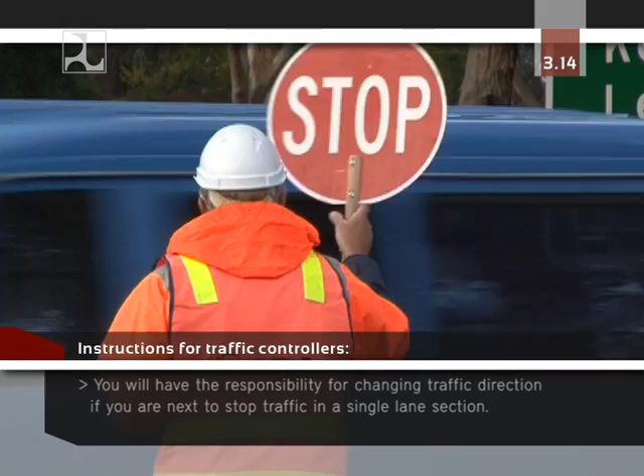If you are working a single lane section with another controller, you will have the responsibility for changing traffic direction if you are next to stop traffic. Once traffic is stopped, change your position if necessary, so that you are clearly visible to further traffic as it arrives. Stay at the head of the traffic queue and stand by yourself.

The following case studies from roadwork sites around Indonesia offer an opportunity to examine some road safety issues from real roadwork sites. What has been done, what has not been done, and what the safety consequences may be. In looking at these case studies as a group, some common themes begin to clearly emerge. They include the use of the zone concept. The zone concept is not commonly used except on expressways. Zones should be used at roadworks on all road types.

Zones do not reflect driver operating speeds. When used, the zones are too short. Make sure you look carefully at the operating speed and create zones accordingly. Inconsistent speed management. Speed management is inconsistent at work sites. There is a need to place clear and conspicuous speed restriction signs in the advanced warning zone and to repeat these as necessary.